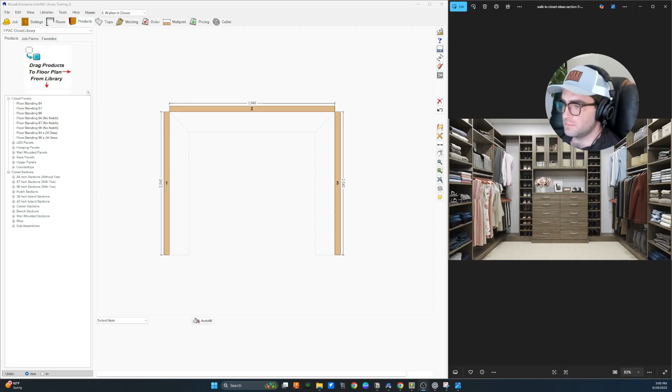All right, so let's draft this walk-in closet here over to the right, and I'm going to do a couple little tricks here. I'm going to pull in one wall. You can actually watch as this goes together as well. I'm going to pull in another wall.

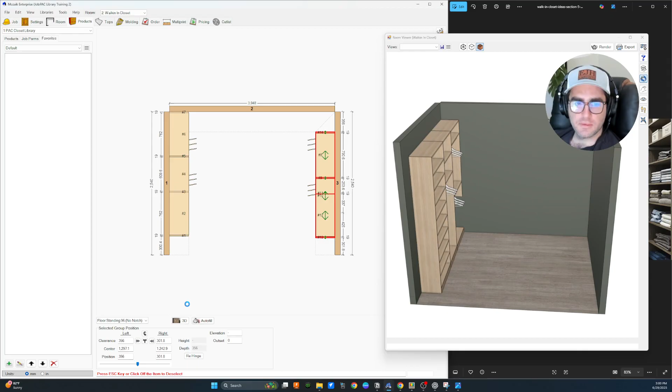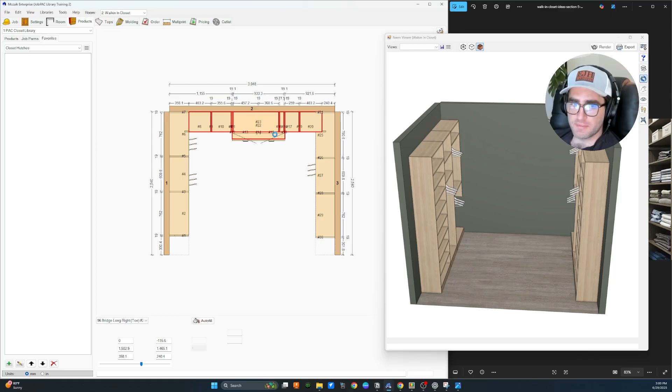The method I'm using right now, if you're not familiar with it, I'm actually pulling in entire assemblies from the favorites tab. This is a pretty cool method for building out closets. Of course we can't export and import favorites, so you'd have to build these out on your own, but you can save them to your favorites and then bring out common configurations. I just wanted to show you guys this because I think it's really cool.

And then I can center this on the wall. And there you go. The entire thing is built out from the favorites tab in like 30 seconds.

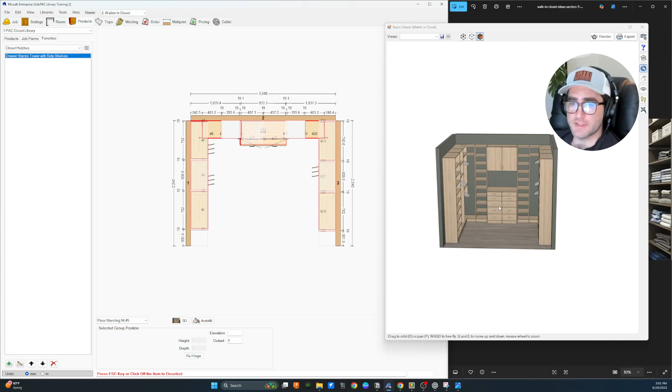So we're actually going to show you how to build this from scratch. I will delete all of these cabinets. The favorites tab will come in handy later on for these hutch assemblies, but for now let's just build it from scratch.

So we'll start in the job tab, right? Fill out all your job information. Of course, just a sample library. Get through that quick. Settings, super important, but you're going to pick your PAC Closets template.

The only thing that might be different in here is since we're doing glass doors on the uppers, we're going to want to pick glass doors for now. I'm going to leave this all empty. This is going to be just a straight classic glass door. I can show you how to make a glass door out of laminate in future videos. There's a lot of edge banding involved. It's not super fun, so we're going to leave that out for now.

Alright, so once all your drawers are selected, your doors are selected, we're using inline hinges. That's just the best for closets, honestly. Then we're going to go over to drawer boxes. We are using metal drawer boxes, the Richelieu Optimize R. You can use pretty much any drawer box you want. This is the one that we have.

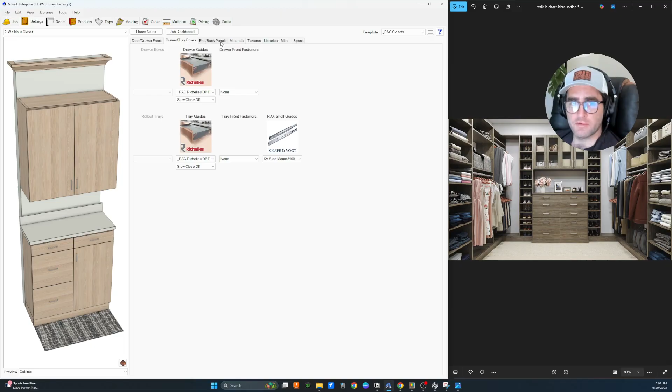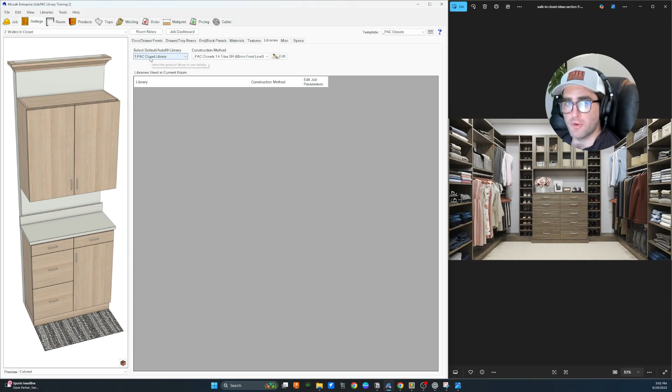End panels, materials - I've already overridden all of our textures right now for this ash sandy because I think it looks good. Textures aren't really important right now unless you're using inserts. None of these stainless steel things need to actually change for now. And then the library, of course, PAC Closet Library. Miscellaneous, I am using the Q-Peg, not the K-line adjustable shelf pins. These adjustable legs are only for islands, so we won't even use them. And we're not using LEDs, so these spot and linear lights don't make a difference for this closet.

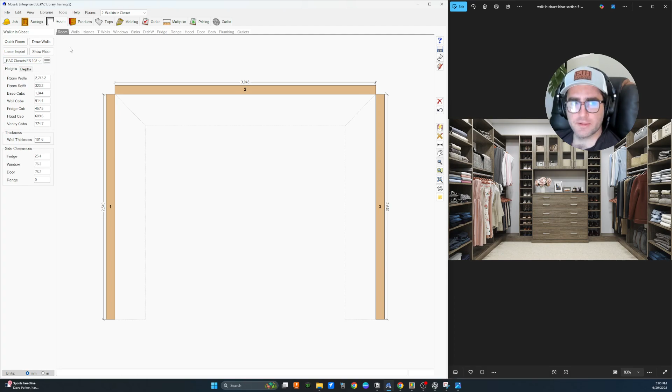So the first thing we want to do is go into the Room tab and figure out which one of these templates that we need to start off the room. We're going to say it's a 108 ceiling and it's floor standing, so the FS 108 ceiling. This is going to populate all of our depths for us.

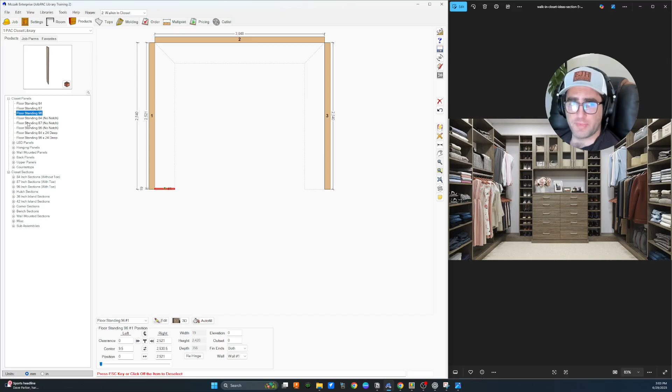Now we're going to go into the Products tab. Make sure that PAC Closet Library is selected. And this library is extremely easy to use, right? So we are just pulling in from our list of panels to the left here. And I have a 96 panel. And then I will go to the 96-inch sections.

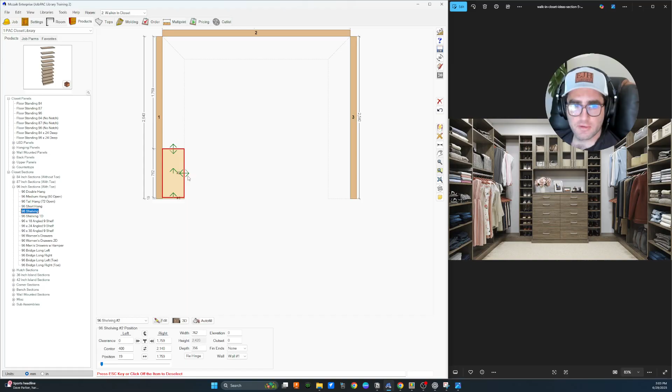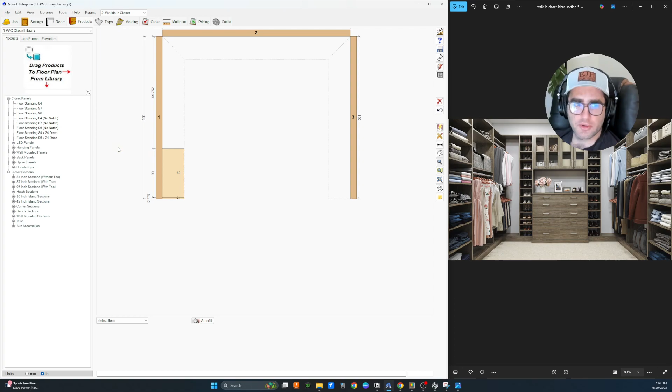It looks here like we have a full shelf unit here. So I will bring in a 96 shelving, drop it in. Now as far as the widths and everything goes and units, I'm going to stick with inches unless I'm really in a pinch, then I can go to millimeters. And I'm not going to get this closet perfect, right? I don't know the dimensions of all this. I could probably guess most of them, but this is just to show you how you would go about creating this system. So we've got a 96 panel here and then a 96-inch section.

Let's just bring in another panel. You'll notice we're working from the left to the right. And then we have kind of a single hang with shelves above it. So we will go into the 96-inch sections. I'm actually just going to take a medium hang for now that has a shelf above it, 24 inches wide, that's fine. We'll pull in a panel.

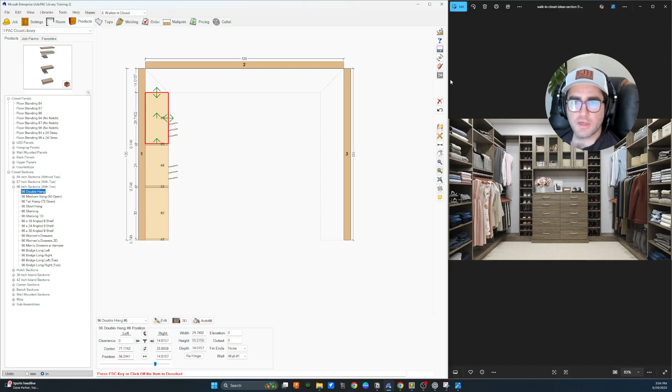Then we have a double hang and a bridge unit. So let's bring in our double hang. And if we go into the elevation here, we need to add a hanging panel, right? Always up against the wall, a hanging panel, so that we don't have to cut out our baseboard and we don't have to mess around with all of that. So we'll grab a 60 from the hanging panel, exactly where it needs to be, height-wise. We'll bump it over to the right.

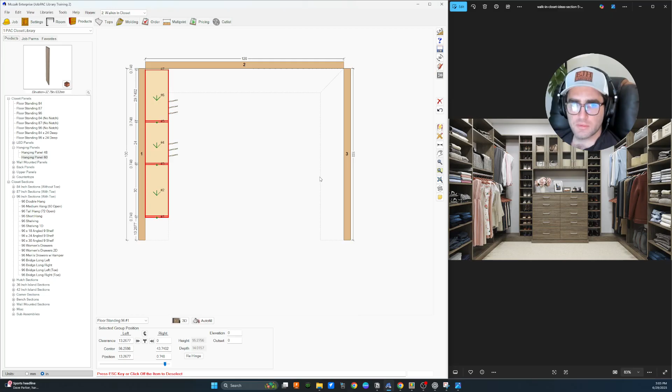And then I'm just going to highlight this entire assembly and just move it to the right up against the wall. So that left side is built out. Now we're going to build the right side out. And it's basically the same as the other one. So I'll keep this up here while I build it out. You could definitely do this in front of a customer if you needed to. You could also take a little time to yourself and gather this up, show your customer while you're on site.

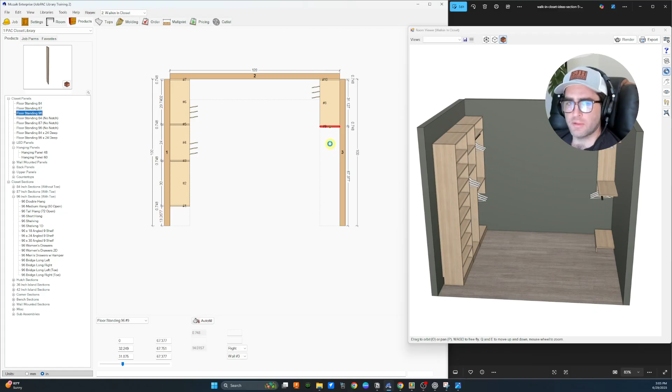However works best for you. At the beginning, it might be a little clunky, but you'll learn pretty quick how to throw these closets together. And what's nice about this kind of simple closet setup is that it is basically ready to manufacture right out of the gate. Of course, you're always going to want to check it, but we're just going to grab our medium hang, some shelves above it.

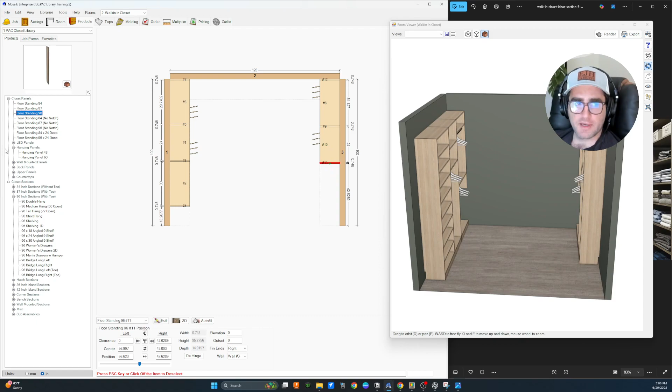Of course, you can copy and paste panels if that's what you're into, or you could just go over here and grab your new section, put another panel down. You'll notice that these panels still have notches in them. If you don't want a notch because this is an exposed finished end, then you could just delete these and bring in the 96 no notch.

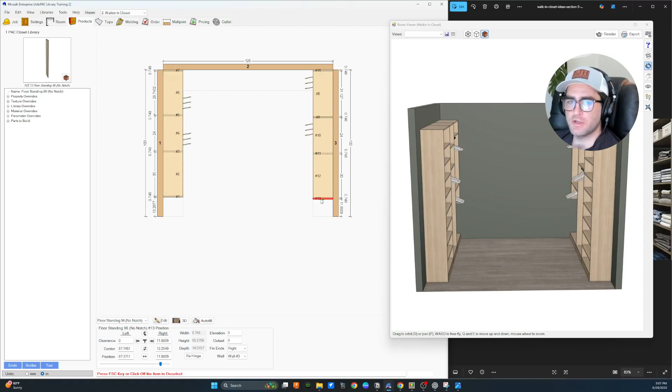You could also go into the panel and remove the notch with parameters. I like having all of these products so that you don't have to have someone super trained in Mozaik to actually draft these closets. Now, if these closets were up against the wall on the right here, you want them about a quarter inch away from the wall, maybe 1 inch, whatever you can get away with to dodge the baseboard. Maybe put in a hanging panel instead of a full panel here. You have to dodge baseboard.

And now for the fun part. So we have this hutch section right here. You noticed at the beginning of the video, I literally just took out this entire stack all at once. I'm going to not do that this time, and I'll just show you how much time it takes to draft a hutch section.

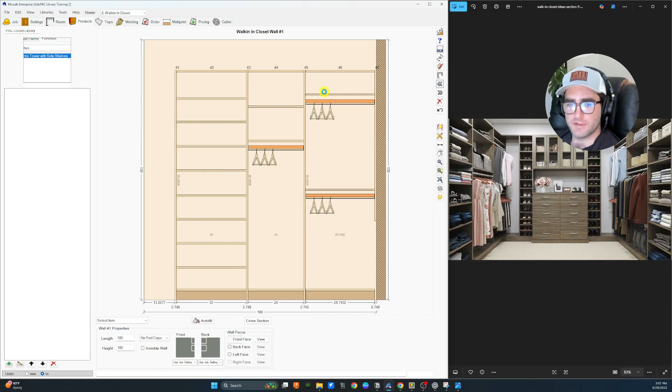And we can move to the left here to look at and view our cabinets. They're looking good. We're going to bring in our hutches now. So we'll click on wall 2, go into elevation, go back to products, and then we have a special section here for hutch sections. So I will bring in base drawers 20.

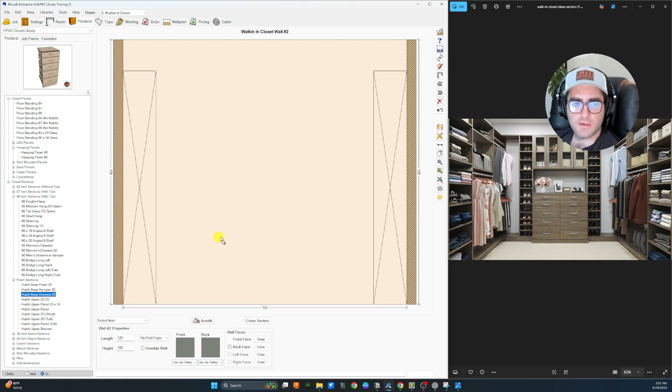I'll bring in a base panel to split in between them. Remember, we're still doing sections for hutches. And then I will highlight this stack, center it in the opening. I'll pull in another base panel.

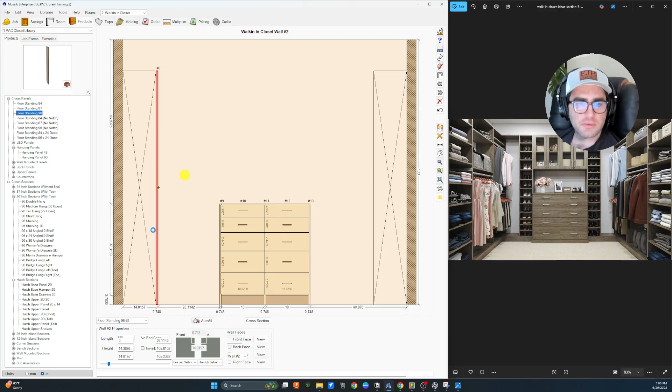And let's add some full 96-inch panels. And then we'll add this upper section in here. So in the hutches, we also have uppers. We have upper panels. We have an upper section, upper panel.

And we want to just type in the height here. So I'm going to go 30. Remember that height increments always round down. This section is locked. We can edit the cabinet, go into size, and allow height sizing. We'll type in 30 for the height as well.

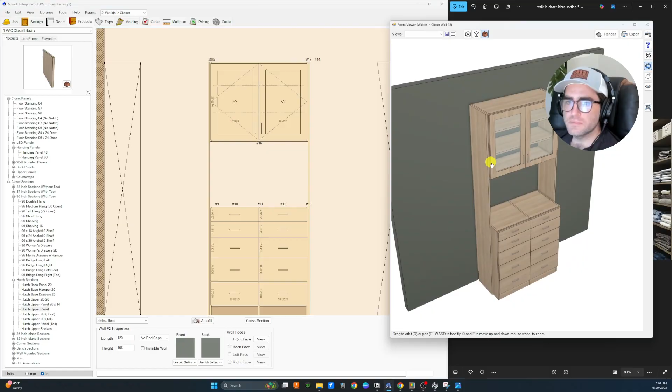And we can click on this button here to stretch the item in the opening. And we don't want to forget about this panel. So 30 inches. Now we have an entire hutch assembly. We have the full 96-inch by 14 wide panels. And then we can also add a countertop in here.

So there is a countertop section to the left. Stretch it to the opening. And then we can add in our shelving units. As you can see, it's very easy at this point, but I do want to cover bridge shelves because that's going to be very important. If you can get your customer away from the classic rounded corner units, then you're going to be using a lot of bridge shelves. Hopefully.

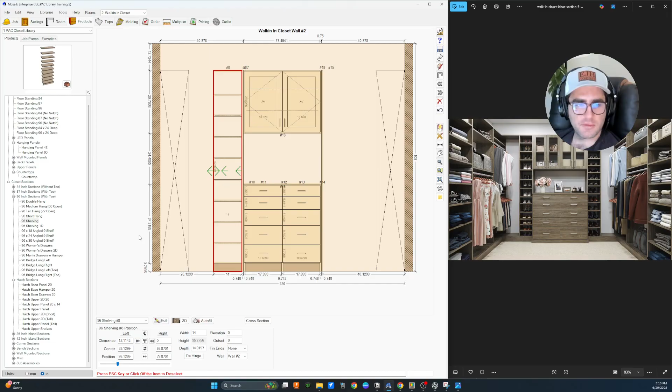They are easier. Put a shelving unit here and here. And then I will add a couple more panels. And then last but not least, these bridge panels. So we'll go down in the 96-inch sections. To the bottom, there's all this bridge left and bridge right.

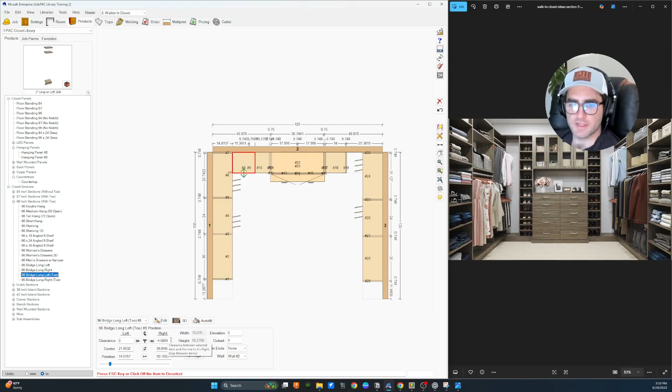I'm just going to drop the bridge left into this opening, bump it to the right. You can see it's overlapping the wrong cabinet, so I'll bump. Now it's overlapping. This is exactly what we want because this is the part that you may have to cut down on site. You most definitely will have to. So we've got about 15 there.

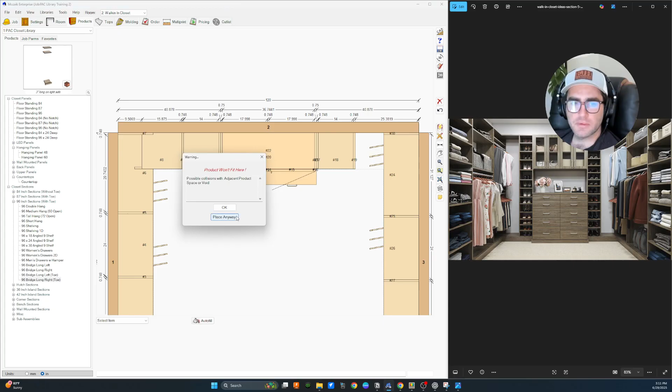And from the edge here, we want about 26 to 30 inches, so you have plenty of room there. And then we can drop in the right section as well. We're just about done with this thing. All right, and now this thing is ready to go.

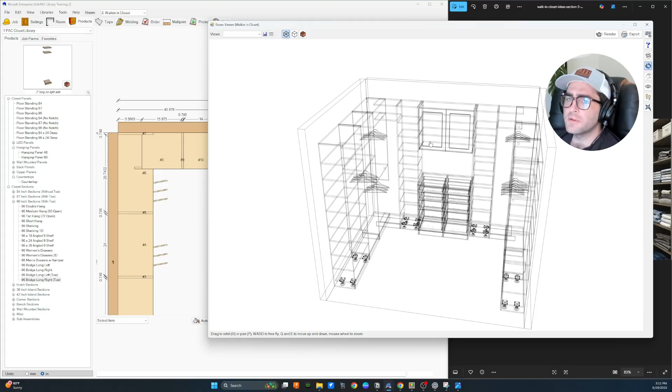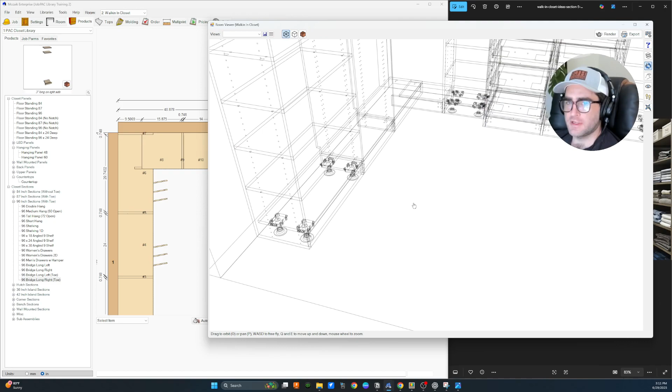We have 10mm holes for our Titus Q-peg, which is really nice. The adjustable shelves act as structural. We're going to turn off these legs. Those shouldn't be on. So we can go to Job Parms, O, then say Use Legs, No. We don't need legs for these closet sections.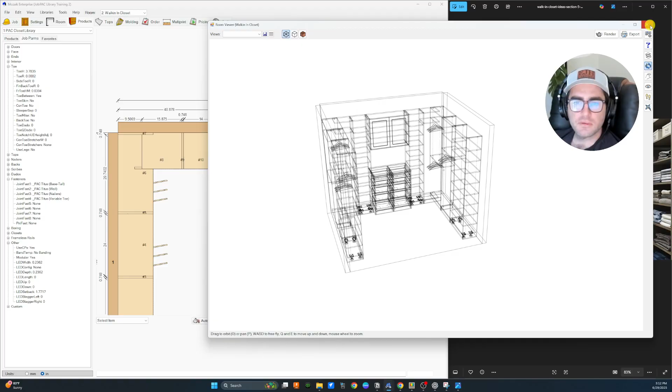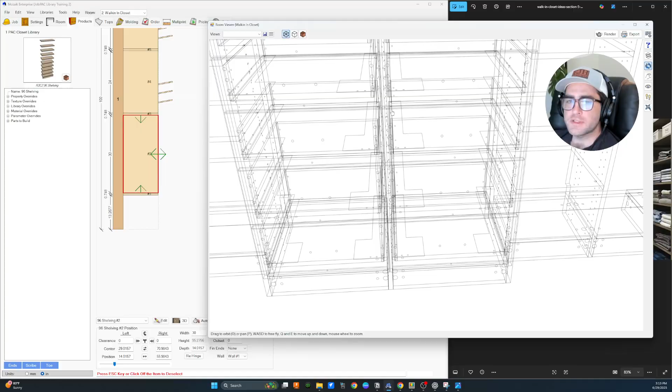You're going to notice these weird pockets on the drawer boxes. That's so we can use 3/4 inch material for literally everything. Even though those metal drawer guides say they require 5/8, we can get away with 3/4. The PAC library - it's basically ready to go.

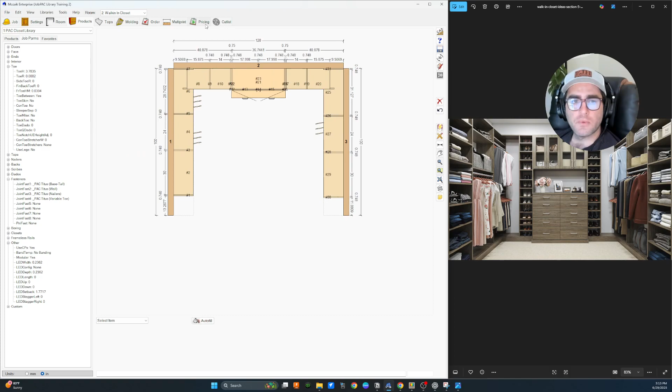So now that we've got this all drafted up, we're going to go to pricing. I will make a new template up here. Select template, I'll pick the closet invoice by room. Say OK. We have a couple rooms in here.

I was drafting one earlier, nearly identical. So we'll see that room 2, the one we just made, walk-in closet, invoice for about $10,600. Everything should have some kind of dollar amount in here - that's what we're looking for. And if it doesn't, there should be a good reason for it.

Base cabinets - we don't actually have any base type cabinets in this room, they're all wall or tall cabinets. Here we have tall cabinets. We have a linear light section - there are no linear lights, so that isn't populating anything.

Besides that, we have our per section pricing, and moving down to our optimizer guides - those look to be right on the money there. Perfect, so you can see the amount per cabinet. I'll go through pricing in another video.

This is just a basic rundown. So once you have this invoice, you can then run a report, and I'll create a video so you guys can follow along and modify this report.

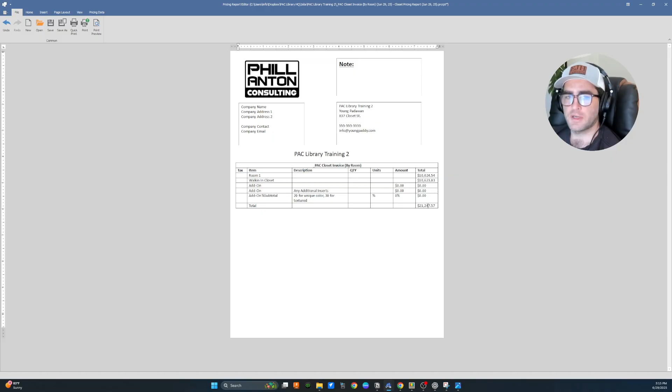But let's say OK, yes. And it's very basic - this is just the two rooms and the total. You'll have all of your company information, your company logo. You could actually use a different template and we could just pick the closet invoice.

And when we pick the closet invoice, you're not going to see it parsed out by room anymore - it's just a grand total of everything. And you could also run a report on this, have a total of everything. So you could draft this.

I was creating a video while I was doing this. What are we at, 15 minutes?

You could easily draft this in about 5, 6 minutes in front of a customer after talking to them for a little while. Wait for them to take a break, or however you want to play it - draft this room and then have a price for them. Super easy.

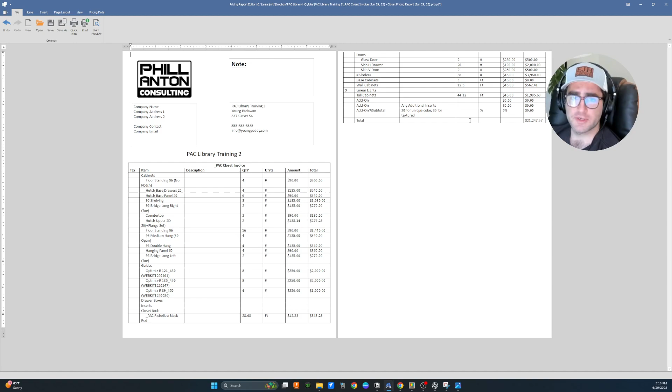And you'll take it back to the shop and cut it out. Hopefully you'll get a check that day.

Let's just keep it going and we'll go to the checklist, to the cut list, and make sure everything's cutting out okay. All right, optimizing.

I am using Enterprise, so it might look a little different if you're not using Enterprise. I'll call this test run. I'm only going to select room 2, the walk-in closet.

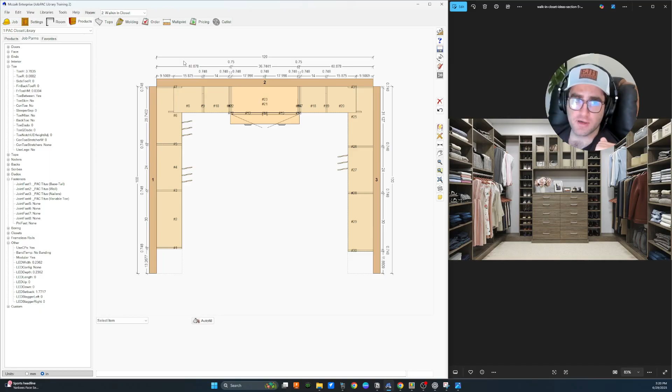And you'll notice I have 3/4 melamine Snow Day and 3/4 melamine Ash Sandy, and that is because our 3/4 melamine is actually taking the name of the texture that's attached to it. If we look at the override for this material template, everything is 3/4 melamine - it's also adding texture.

Let's go back to the cut list, we will optimize. Do it again - test, walk-in closet. Wait for it to pop open. Go, all right.

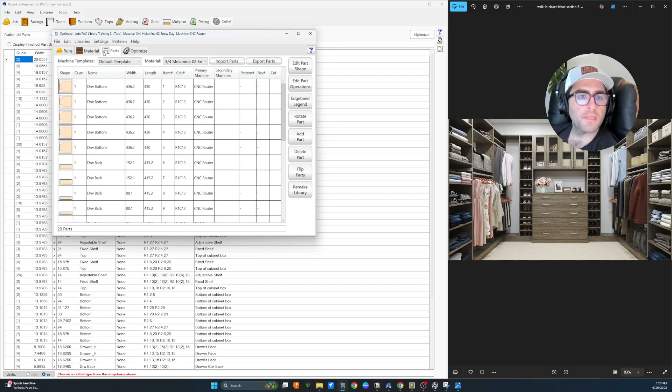So by this point, you probably know how to use your optimizer - get the correct tool set going. We're going to optimize everything, just batch optimize everything. Automatically flip parts, generate the G code, and we're complete.

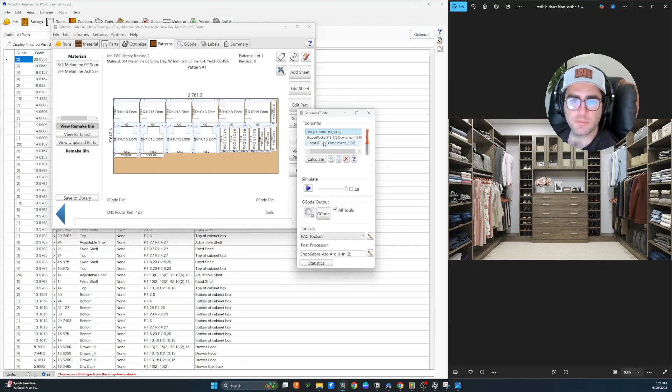It's ready to go. We'll look at these drawer boxes and see how those did. Perfect - a bunch of 5mm holes, a lot. 1/2 inch down shear because this material is thicker than 5/8, so it's going to do all of the pocketing and cut out.

That's about all there is to it. That is design, pricing, optimization, all in about 17 minutes, but I'm sure you could cut that at least in half if you're on site just for a single closet.

And just keep in mind that after you've drawn a few jobs, you can go in here, select what you want to pull in as a favorite. Let's say we're doing this very often - I would highlight all these items, right click, add to favorites, then add it into closet hutches. Now I can pull those out whenever I want.